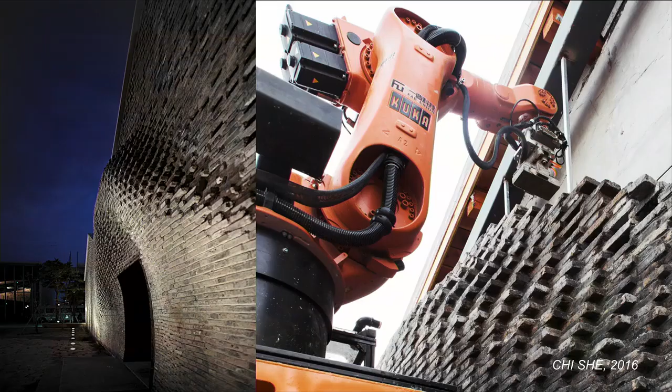So the methodology is actually, we use sensoring, which gives feedback to the different geometry center of the brick, and position them by the center of the geometry, putting them piece by piece on the wall. So it's a kind of roughness compared with this kind of accuracy. Each block, every piece of brick is different, but the position is smooth on the wall. It's a kind of posing out as a cantilever structure.

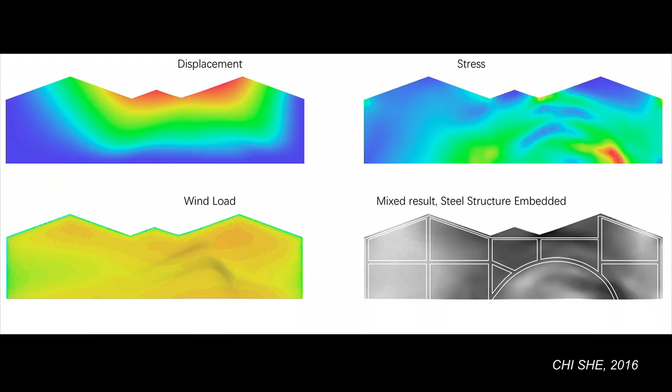It's 1.8 meters. So the whole design process, we name it like the performance-based design process, because it's totally based on the wind load, displacement and stress, and actually the layout of the bricks, the density of the bricks, is a kind of performance of the material.

I think the process is hidden behind it because people don't notice this kind of performance-generated process for the facade. But actually the quality is this differential accuracy, preciseness, which is created by the machine. So it's a collaboration process by machine and human.

And next I want to talk about this, which is my office. In the last 10 years, year by year, we constructed a lot of different structures inside our office, which is a dream and description of our understanding of how to make architecture as a process.

I think what we are doing actually, we talked to Antoine Picon. He visited my office twice, and we invited some professors to make discussion in-house talking about authorship recently in design. So the first part, I'm talking about the emotion, the creativity of designers, to understand how to collaborate with the machine. But on the other hand, it's very important.

We need some tools to set up, to collaborate with us. So I think we are the first design office to have this kind of robotic yard in-house, which was constructed in 2015. We have exhibition space, we have a research center. I think everyone can touch the robotics in-house, in the design office.

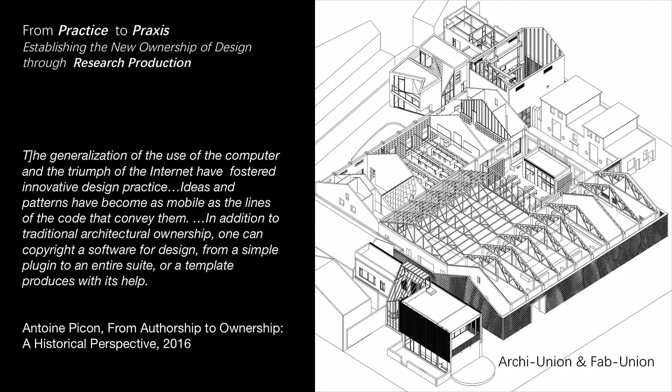So that's not just about the machine, but also we have people working in my office. The guy on the left, his name is Qian Meiyou in Chinese. Qian Meiyou means, in English, 'no money'. It's a very funny name because he grew up in a very poor rural district of China, and his father was so sad he got born, and gave him the name 'no money'.

So he's a very good carpenter. We've collaborated with each other for more than 15 years. I think he teaches my students and my colleagues. I think what we are learning is not from you guys, this kind of expertise in the design society, but which is very important, we're learning from the local carpenter.

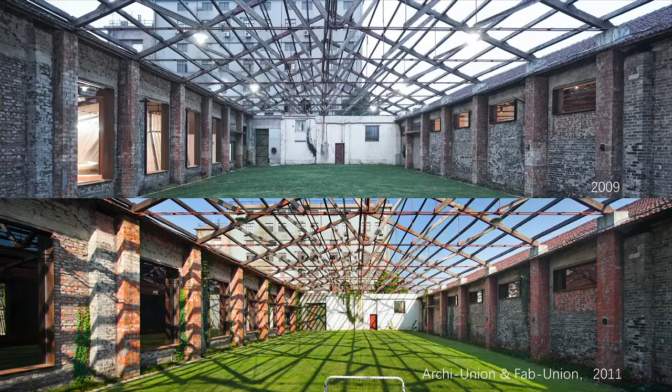So they've taught us a lot in the last few years, including this year when we went to Venice. He's traveled 3 times to Europe this year. We participate in different exhibitions. So he's special. And also I think the office is growing.

It's not a frozen moment, where you design a fancy style or a fancy form. It's very normal, because a design office always doesn't have enough money to set up everything. So it's year by year.

We set up some ivy. They're growing year by year, from 2009, 2011. And right now, I take pictures. Last year it looked something like this. It's a paradigm for us, it's a dream for us. It's the place we're living, we're working, and we're trying to do a lot of experiments in this college.

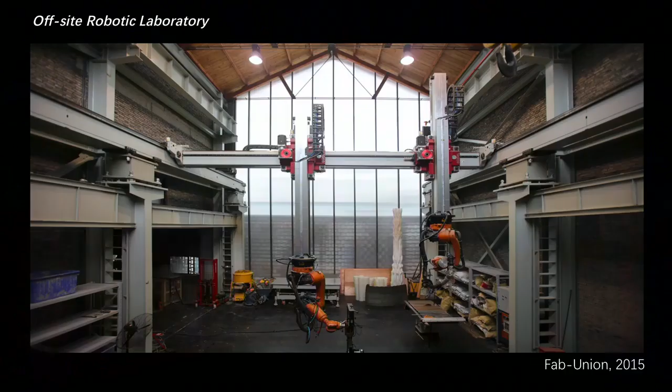So what is special is in 2015, we set up an 11-meter span and 12 meters long robotic factory. I think the specialty is not the factory itself, but that it's very close to the office, just next door.

My team has two parts. Archi Union is a design team with around 75 to 80 designers in-house. And Fab Union is a fabrication team, mostly my students after graduation, around 20 people right now.

So it's like a collaboration model. We try doing some experiments. This kind of partnership between design and fabricators isn't common in the industry outside. I don't think we should educate my students to just be consultants. I think we're teaching them they can play a leadership role in future projects, integrating not only design but also fabrication, so they understand both the design methodology and the fabrication methodology.

So that couldn't be subdivided into two separate stories. Right now the industry isn't growing so fast, I think. We need to teach them - we spend a lot of time communicating, telling them about cost efficiency and everything we can produce. We can give them new opportunities. I think that's why we can play a leader role in the industry - we are the industry, if that's possible. So I'm posing that question as a designer, as an architect.

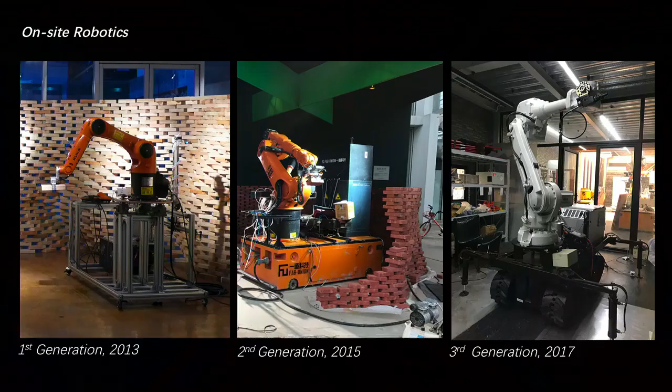And this is the environment we're working in. I think the specialty is the process - not everything is set up at one time. It's a different generation.

The gantry robotics is an off-site facility. This is a different generation of on-site facility we set up. Right now we have the 4th generation going on, developed by different participants in the office.

I think that's the daily life with us - we play with these ideas. Sometimes it's just a dream, just a story, but sometimes it's coming very soon.

We have an exhibition space and organize different kinds of exhibitions every season. We have two exhibition spaces in Shanghai - one is on the West Bund, one is in-house. And we also have a Tea House.

The laboratory design process, I'd like to name it a culture of testing to failure. I want to quote Bruno Latour in his book Laboratory Life - the ultimate objective of research is to experiment, and through experimentation to establish a kind of credibility. So as an analog of the scientific laboratory, the design laboratory would rethink the traditional authority of architecture design. In that sense, architects, especially at the beginning of their career, need to think about how to set up credibility through special experimental thinking.

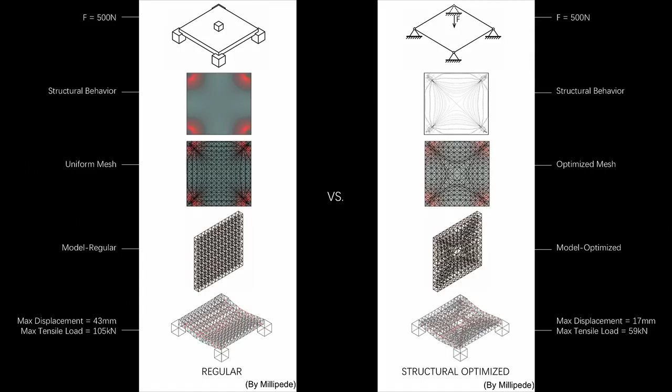So take for example, I'd like to talk about robotic 3D printing, starting from 2013. At the very beginning, we made research on this kind of slab, and several tests were done to compare results from uniform versus structure-optimized mesh systems. The second example, on the right hand, with various mesh distribution, optimized its structural behavior significantly.

And we printed this slab in 2014. I think the specialty is a starting point for a lot of design. We compared the results - changing from uniform to a structure-optimized mesh system, which has much higher performance than a normal slab. This is my studio.

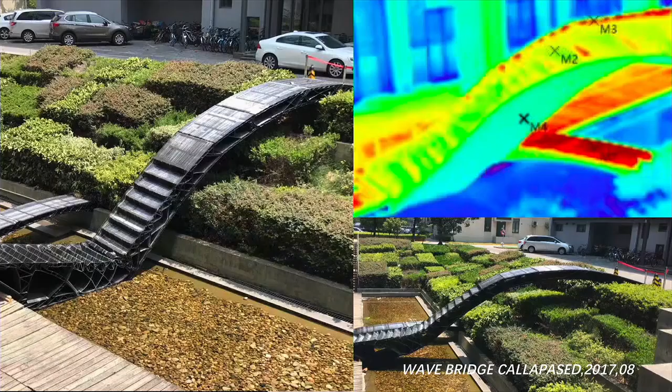42 days. So it was a great failure for my team, because we made all the analysis based on load and distribution, but we didn't recognize that last summer in Shanghai was extremely hot.

It was like 42 degrees. We measured it every day, because after we constructed it we became very nervous as the temperature kept rising. The upper part of the bridge measured 72 degrees, and the bottom was 36 degrees. So the deformation on the top and bottom was quite different, and it slowly broke from the deformation caused by temperature. We learned a lot from this collapse.

After that, we spent 4 months running a lot of experiments, first on material, because the material we used before was modified PLA, and then we transferred to modified ABS with some carbon fiber. The melting point raised by 20 degrees, and the performance was also very good.

We printed this one for a public space in Shanghai, and this pavilion has already been standing there for more than a year. So it was a great testing process.

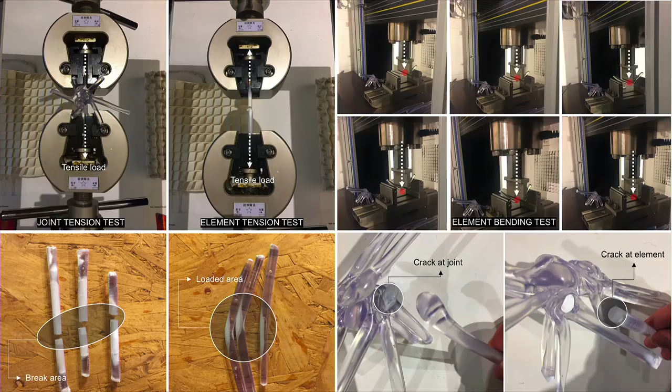In this printing, we carefully tested all the joints, including tension tests, element tension tests, and bending tests. The joints are very weak, so we tested to make sure the joints would be stronger than the bar — that's why we tested whether the joints were strong enough.

After this process, I think we achieved this pavilion, and we're quite satisfied with it. This is, I think, 12 meters by 12 meters — a very big scale.

After that, we participated in the competition for the Venice Biennale China Pavilion, with more than 30 teams competing. What we were doing was really persuasive, because we had already tested for failure and proven that the new material system could be used very safely.

We presented to the jury team. The pavilion was in the Arsenale, in the backyard, a very beautiful park at the end of the Arsenale exhibition place. That is the Italian pavilion; this is the Chinese pavilion.

We spent 1.5 months, used 6 robots, and named it cloud printing — parallel printing day and night — to print the whole pavilion, which is 110 square meters, and unfolded the surface is 220 square meters.

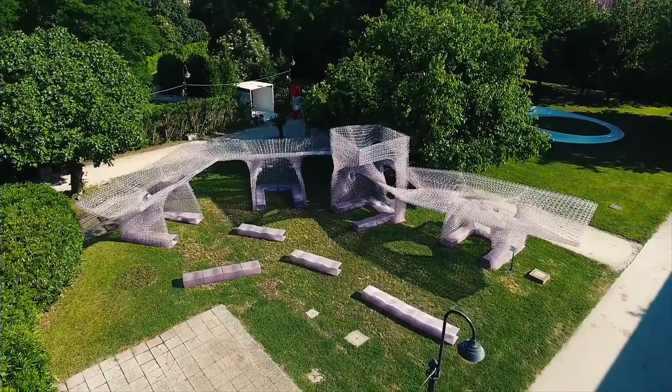We tried to create a shading space because it's a very long way to get there — if you visit, you need to travel at least 1 hour to reach a dead end. So when people go into this garden, they need to take a rest and find a place to sit down.

So we tried to create a space that has a good dialogue with the context — with the trees, the boundary of the trees, and the entrance of the Chinese interior pavilion. So it's an outdoor space, and we also have an interior space.

The layout for the plan has the entrance here. When people come from outside, it embraces them, inviting them in. You can take a seat on different kinds of benches, and also in the 4 pavilions — you can sit inside to find a shading space.

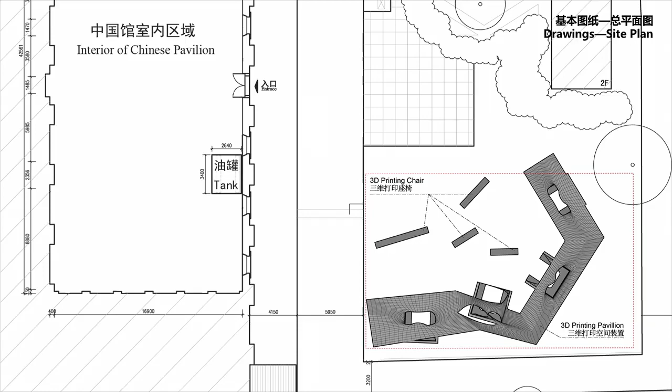So I think the design process is not just about the robotics, it's about the design motivation. And the topic for the Chinese pavilion is actually designing the future for the countryside.

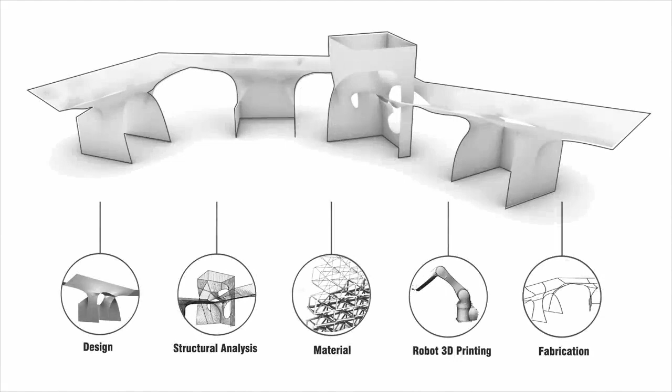So we're trying to prove we can reuse this kind of plastic material. That is a big problem all over the world. Is there any new method to reuse this kind of technology, this kind of material, to create something new?

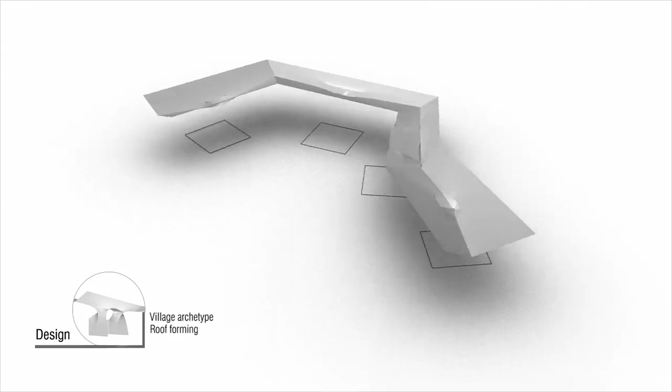This is a design process, actually abstract, taken up from the houses of the village and the countryside. The whole process for the 3D printing is based on the topological optimization process.

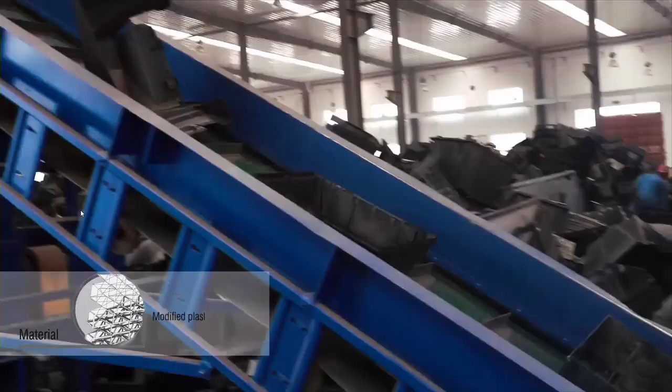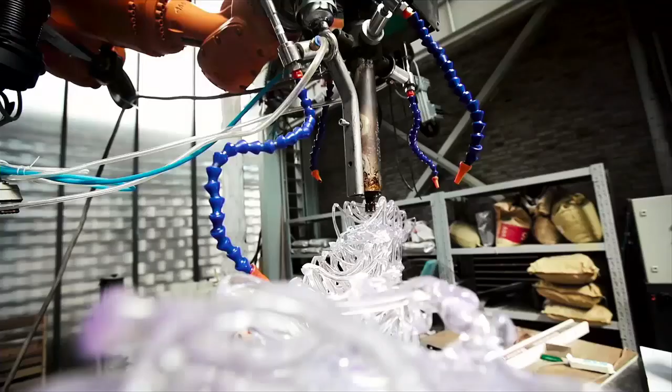We collaborate with this team in Shanghai. The whole process is set up by a lot of tests and experimentation over the last 7 years, from the shared bridge, to one single pavilion, implementing them to prove we can do something special in the future.

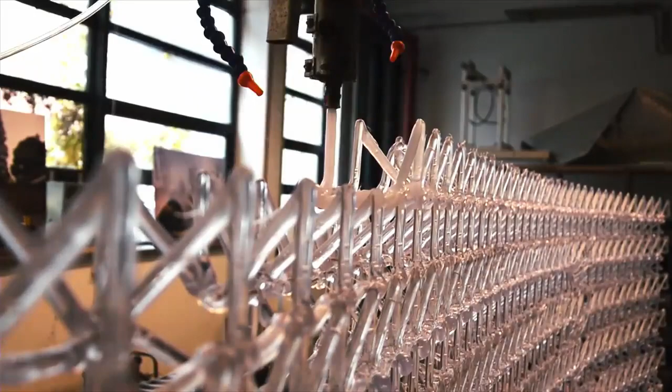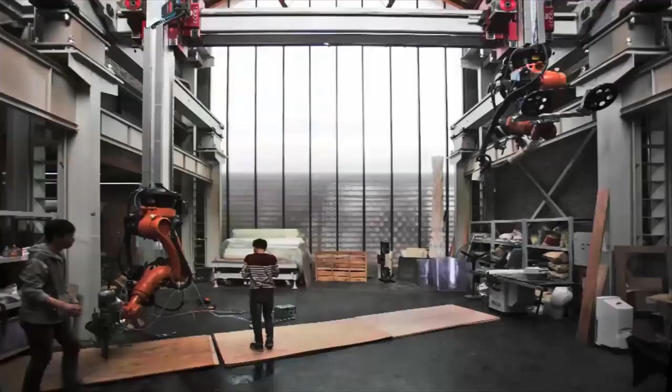This is the printing process, and the other tools are for cooling. This is the weaving process. Right now we test a lot of material, which we can put outdoors or indoors depending on the temperature of the environment. We change the material so it can handle great compression and also tension, and change the percentage of them to make different performance of the material.

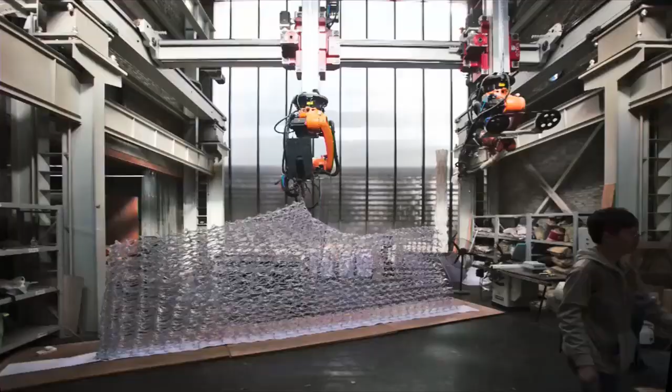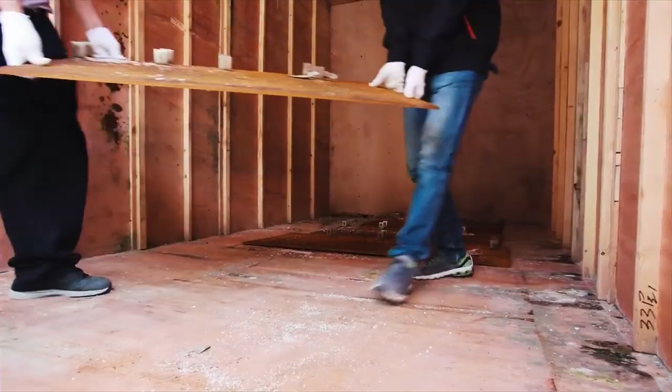In the near future, we'll try to print something special, making some special research with students. So this is the process: we need to print them as pre-fabrication in Shanghai and ship it to Venice.

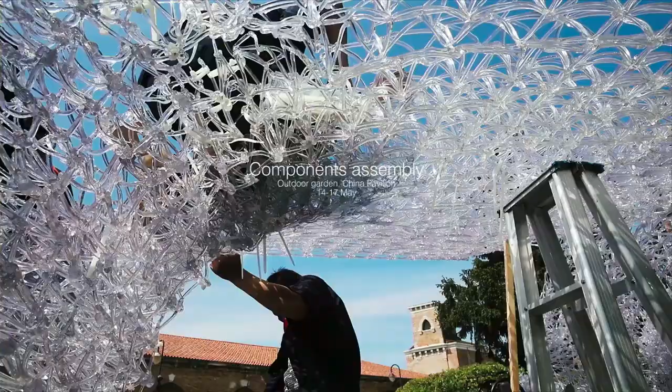In Venice, it's not allowed to make a foundation. So everything, including this kind of very heavy steel panel, acts as a foundation, and also some benches, with sand inside the bench, the foundation. And then in 4 days...

Plastic material—I think right now it's still okay. We have some problems, but it's fine. As to the design, I think from this perspective, you can see the boundary of the trees.

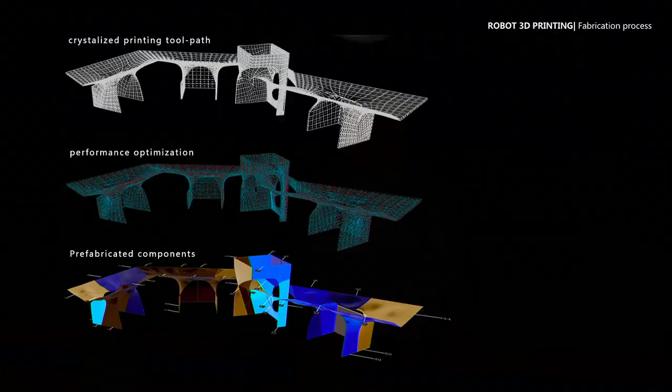This is based on this kind of optimization process. So the specialty here—you can see the boundary, which elegantly has a dialogue with the trees, and also with the entrance of the China Pavilion.

You can see through the garden, and this kind of shading and shining effect is our design. The methodology of the structure analysis, actually at the very beginning, is a flat one, but we made some node shifting, using this methodology to...

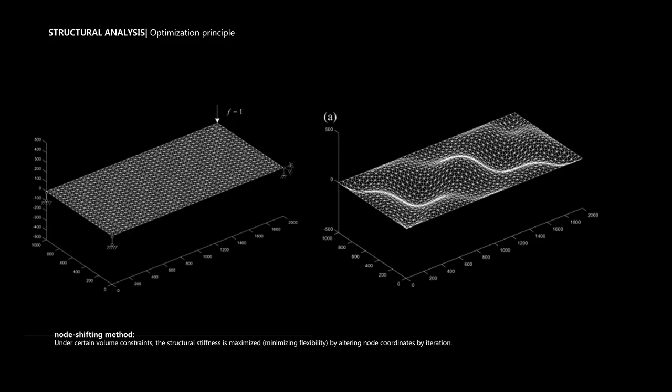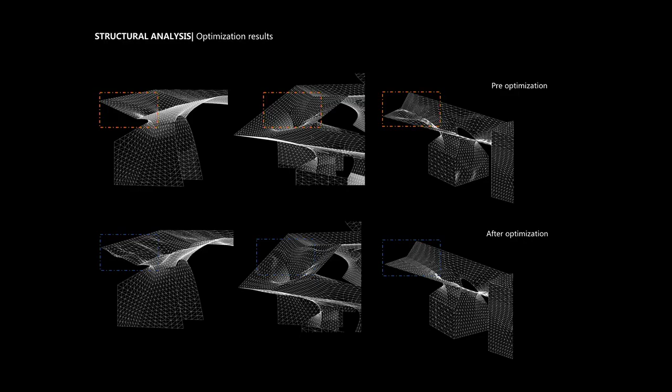minimize the flexibility and enhance the structure on the surface. We also made some optimization from the pre-optimization stage, something like this, and after the optimization, the geometry looks better. So it's all a very slow process in the design to control everything. We have a stress diagram which represents the forces, how they flow in this pavilion.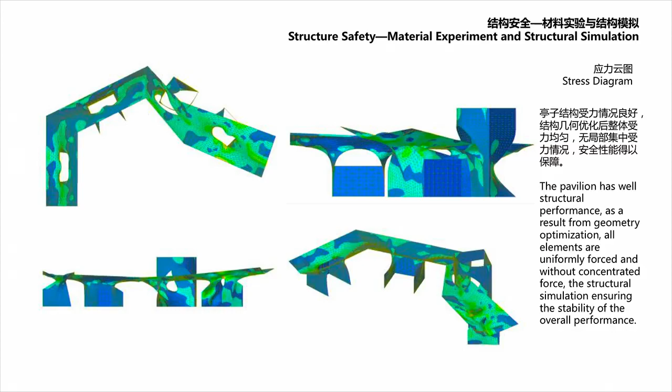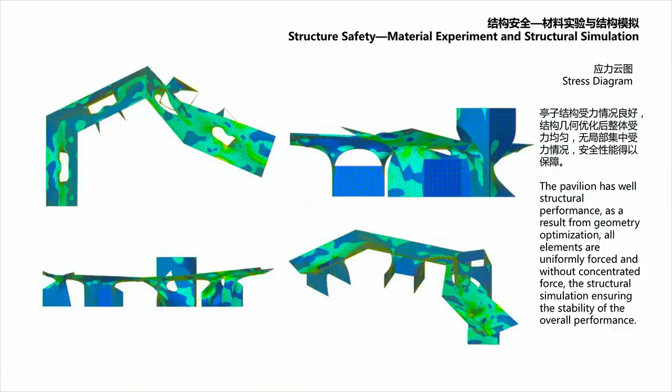Actually, what we're doing is similar to the cocoon chair I mentioned. The density of the printing process is carefully designed in 6 hierarchies, 6 components, and the layout of the density of the plastic makes up the pavilion. So, very quickly, let's go through to see.

In the opening, it's the cloud pavilion. It's kind of floating because the people are in the opening, and we have some special events. I quite appreciate this one. This is some other perspective when people stay inside with the sunshine, especially the kids.

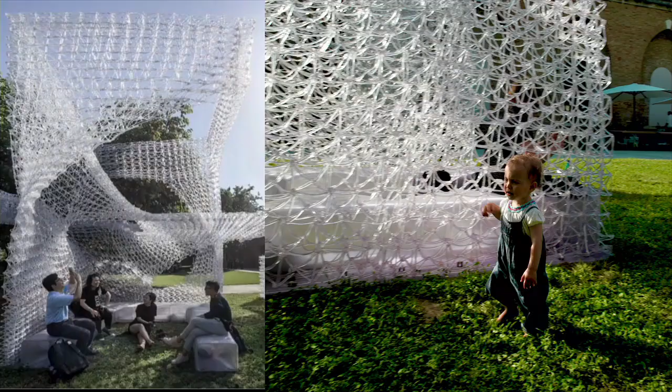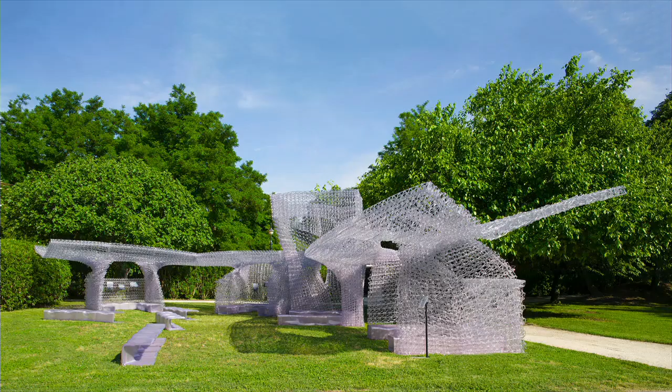Okay, this is the team. Great thanks to Mark Xie—I think he is a very important collaborator with us for the whole pavilion.

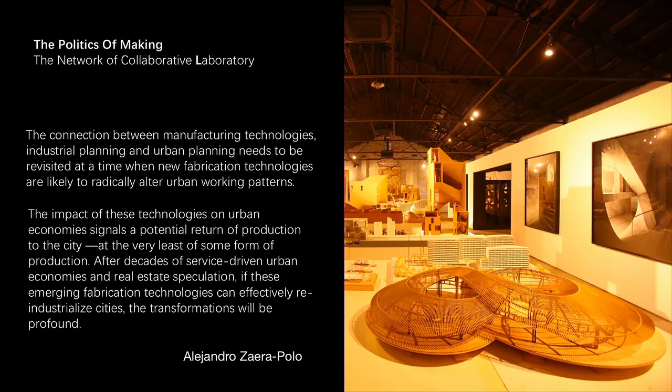And what is the impact for this kind of industry right now? I think it's not a single component of the building, it's a holistic architecture process. We need to understand the meaning of architecture and the impact of this technology on urban economies, which signals a potential return of production to the city. So at least some of this industry is quite interested in that, but their stance right now is not in this kind of automatic production process.

So what we're doing, from the next example, this one was selected to be shown in the Venice Biennale, China Pavilion, indoors. It's a countryside project, a community center in Sichuan province, which is a perfect bamboo structure practice. And this is the whole village.

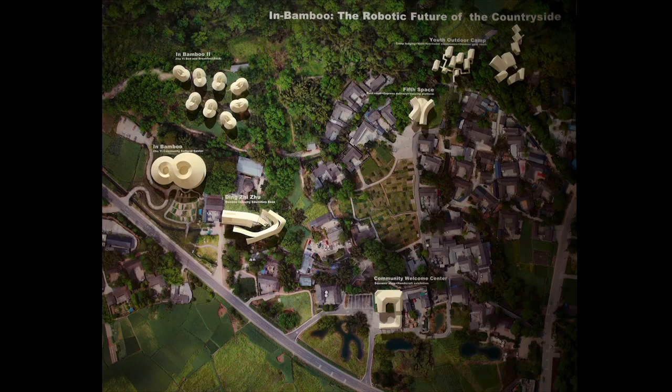The first design for this bamboo project was 2 years ago, and last year, after this project, it was very successful. We designed a B&B, a community industry center, a welcome center for the community, a camping place, a public toilet, and integrated some other programs. So it's like a system in the small village. I try to argue: is there any possibility for the ruralism of China to be changed by the robotic industry? Starting from one project, they are trying to learn this technology to make something different. That's the story I want to tell with this project.

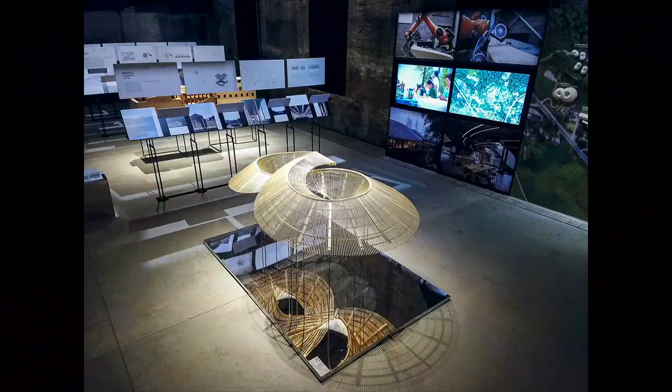At the very beginning, this starts from a beautiful poem. And after design, you can see this special building here, which integrates quite harmoniously with the environment. This is at the Venice Biennale, showing the project.

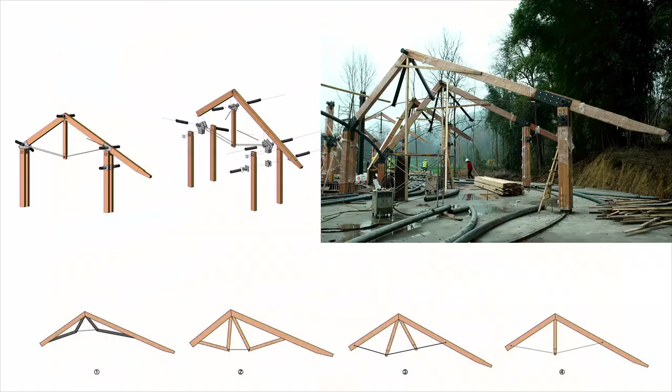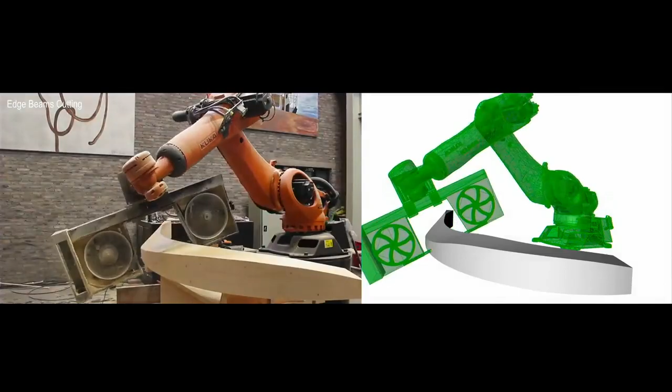Quickly going through. The whole presentation is about the roof system, which is, I think, 100% robotic fabrication. The design process is very interesting for the details, and we're making the details. Every column has a different height because it's a curvature roof. This is the simulation and the real fabrication. We use these tools to make this project.

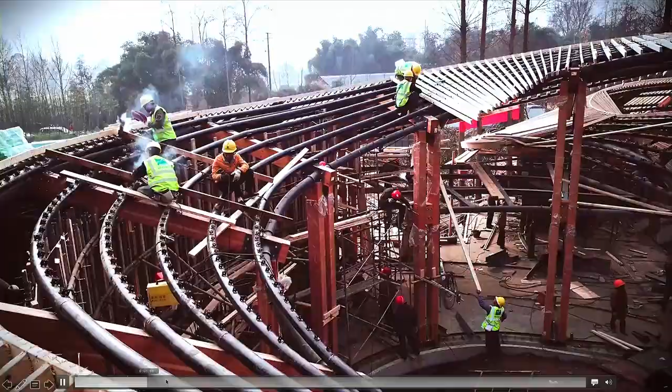This is a very interesting collaboration between the local people and us, making some geometry. I think time may not be enough, but I want to show some process. These are the second phases coming: new buildings.

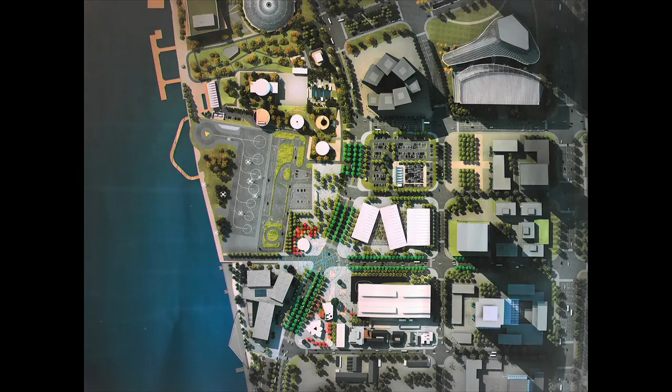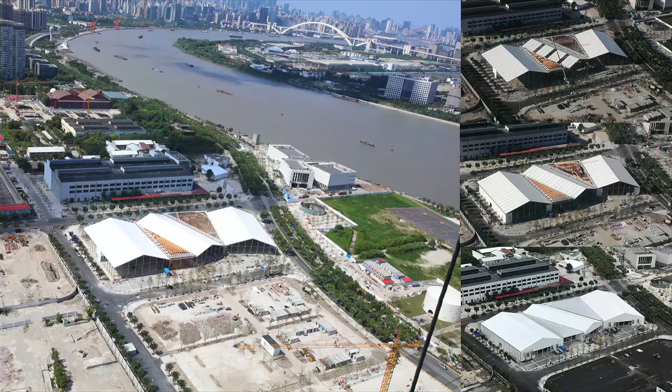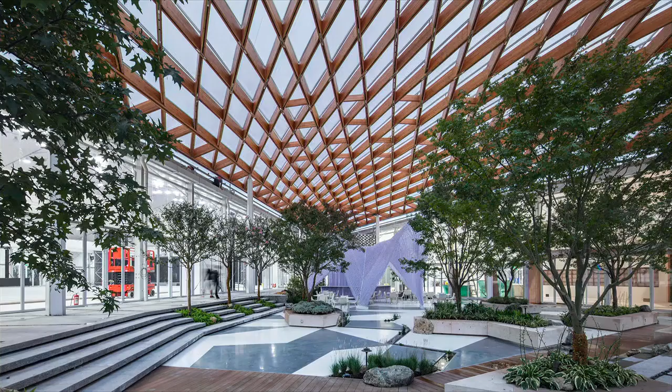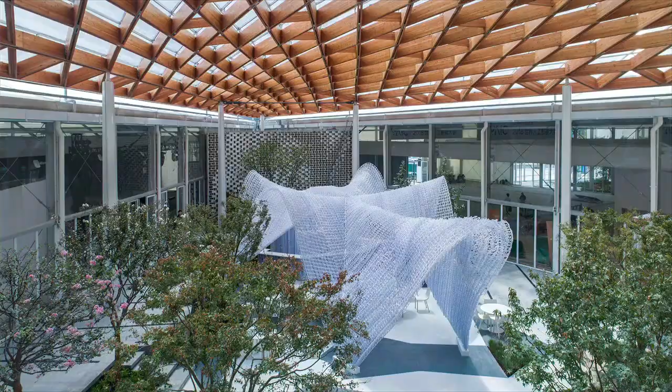So it's a timber structure, finished including design in 100 days. The earlier bamboo project took 52 days. I think that's the cost-efficiency and time-efficiency the robotic industry can give us. This is a 3D-printed cafe, 120 square meters, and this is a 40-meter span, a very interesting timber structure interior entrance.

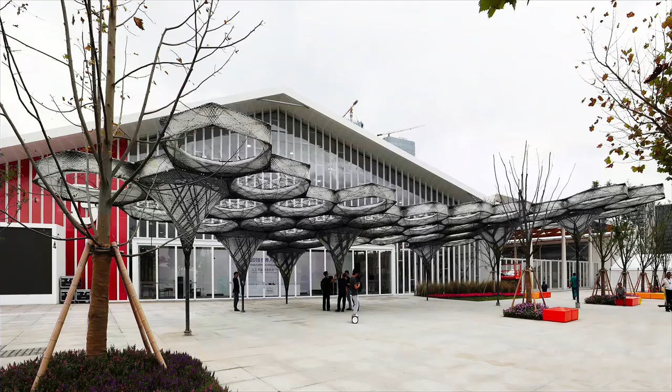So it goes to the last video. This is a cafe, the chair and table, more than 50 chairs, and the pavilion was printed in just 5 weeks. This is from last night, my team sent this. The Achim Menges Pavilion was in Shanghai, a very important street corner. It was a public art project. So this is the last video.

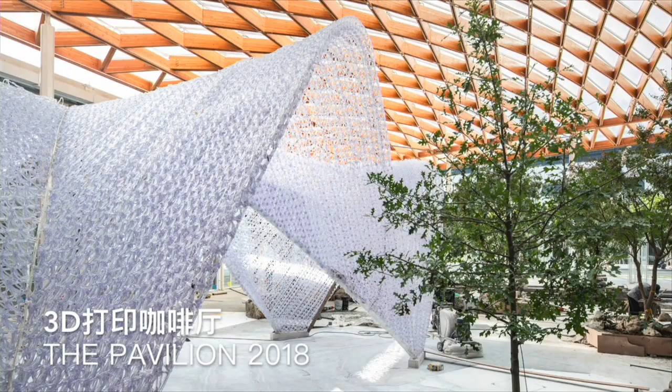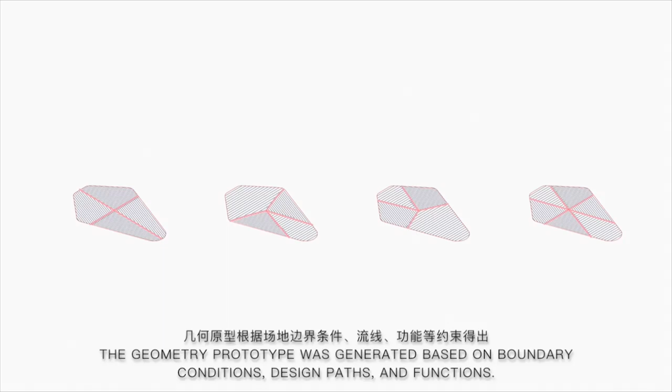The formation for the whole building, including the entrance for the exhibition center and the cafe, the formation process. This pavilion was printed, including furniture, in 5 weeks, and the building was constructed in 100 days. The timber structure took 27 days, including more than 900 components of the ceiling, where everything is customized by robotics.

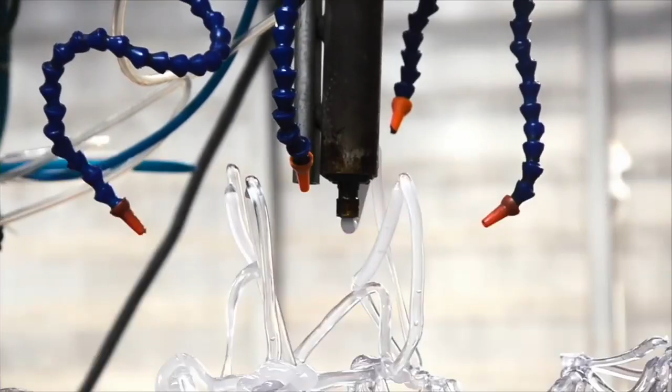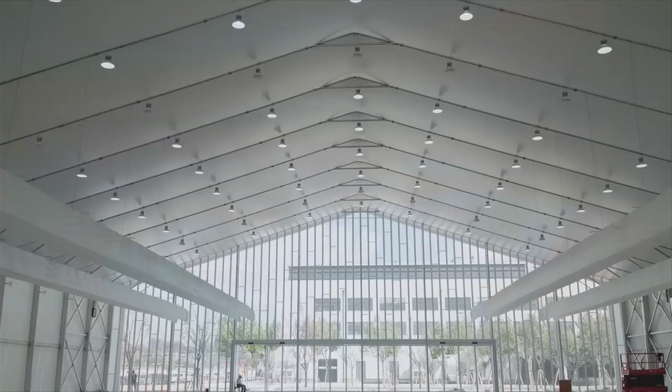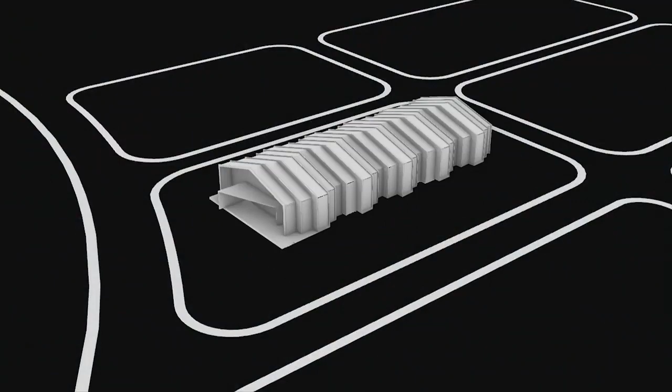So this is a real building coming out from the roof, with the geometry and end-to-end connection. 8,000 square meters, a 40 to 60 meter span, 29 days for the entrance.

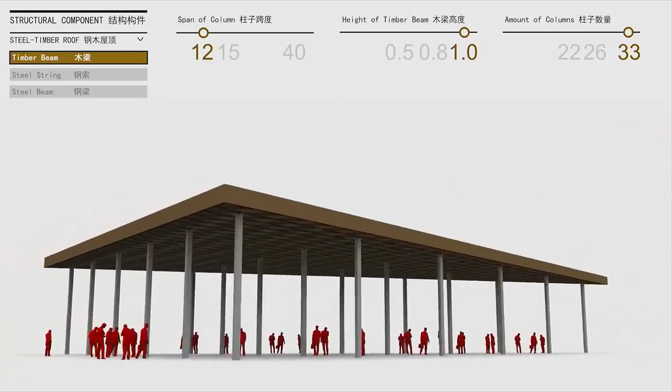This is a lightweight aluminum tent structure. This is a timber structure, so the optimization process goes from columns to taking away the column, making a special arch to support the whole system. So it's a structure, performance-based design process.

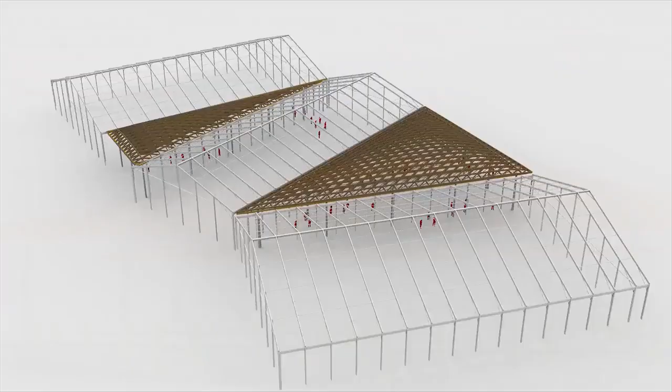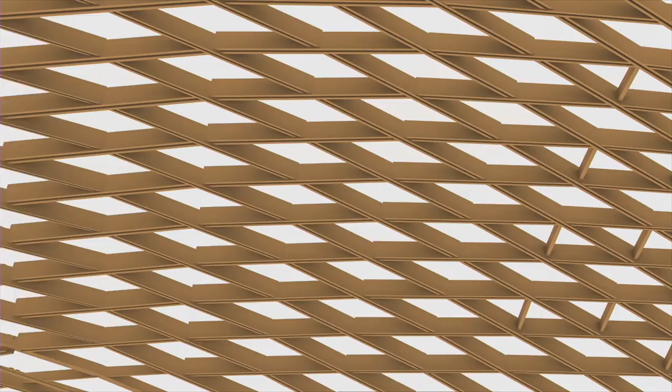Important: everything done in 27 days, solving the tolerance through the details. So we do not waste any components, every piece is precisely cut. The medium is a kind of reciprocal structure system, and we have special details to control the tolerance and the strength.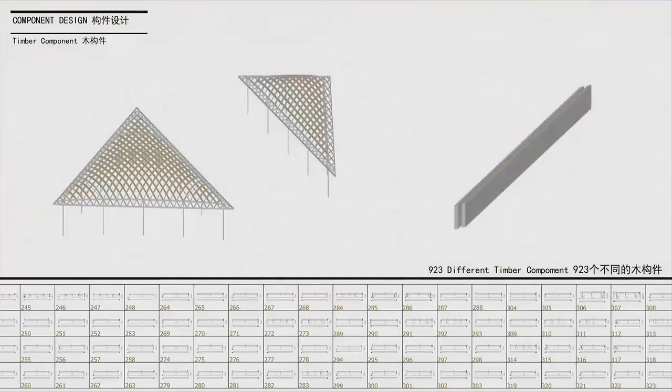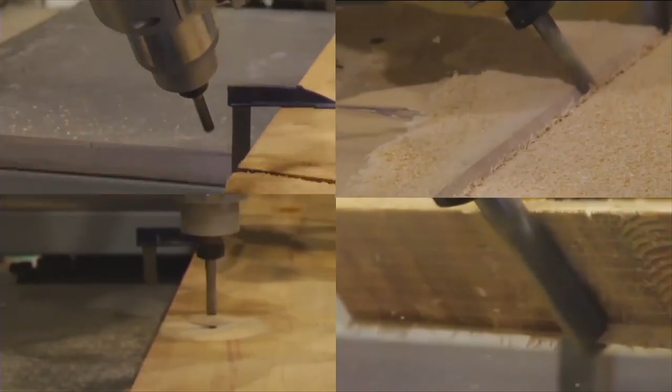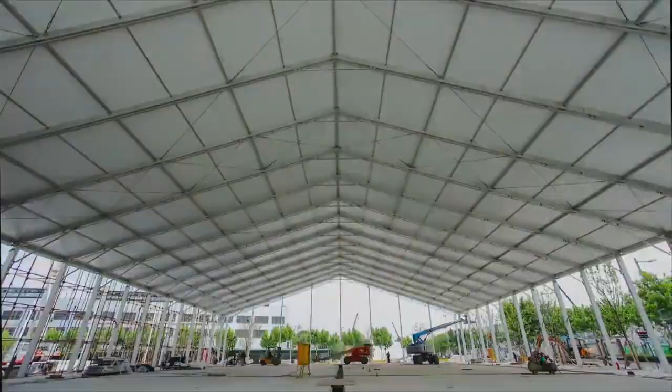Totally 923 components, 14 different kinds of joints, and the milling process used 6 robots, milling for 1 month and a half in the factory for all the details. It's not a very complicated or flashy process, it's very normal, but it saves a lot of material weight because the width was subdivided into 2 parts, 15 centimeters for each piece. It's extremely light.